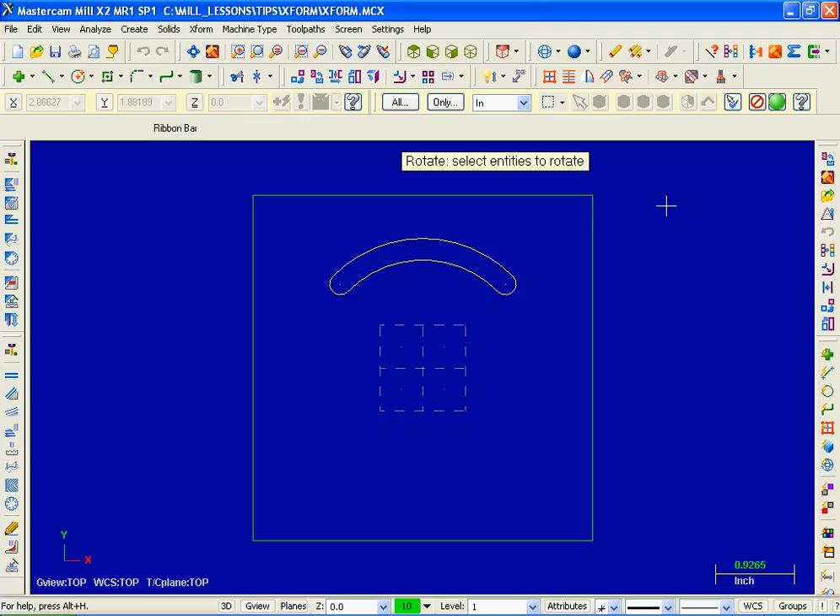slot. Now to move on to the next stage, I'm going to move up to the right side of the screen and click on the icon for End Selection. Now on the left the Rotate dialog box appears, and starting at the top, Copy is activated, so I'm going to keep my original geometry. Now over on the left the number of items is set to 1. I'm going to change that to 2.

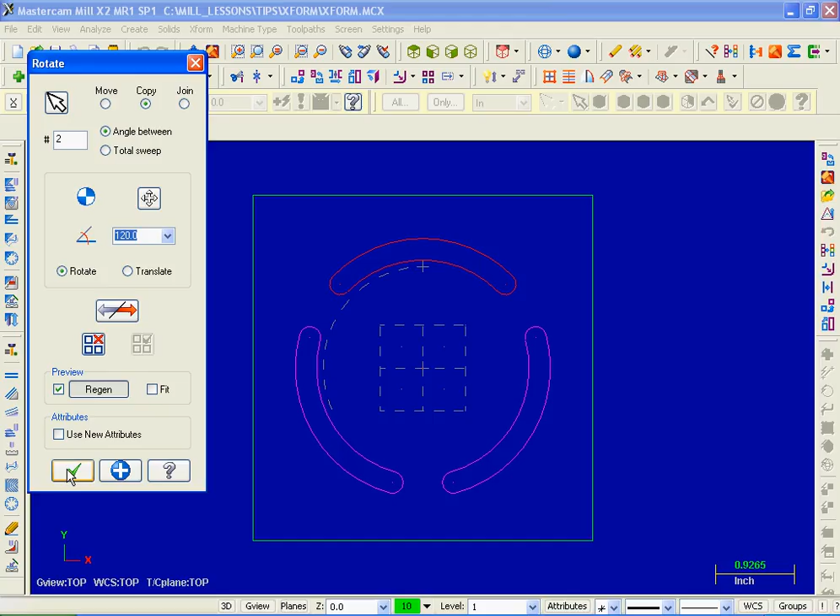Now down below for the angle, what I'm going to do is input 360 divided by 3, which is 120, and there's a preview of our two new slots. Looks good. So we're done here. Over on the left I'm going to click on the OK button. Now before we move on, I'm going to click on Clear Colors and then just slide over to the left and do an undo.

Now the next thing that we're going to check out is mirror, and what I'm going to do is mirror this slot about the x-axis. So into Xform, third one down, Xform, mirror. Now on the graphics screen I'm prompted to mirror. Select entities to mirror. I'm going to hold the Shift key down on my keyboard. I'm going to pick this arc, and once again everything in the slot is successfully chained. To move on to the next step, over up on the right, I'm going to click on End Selection.

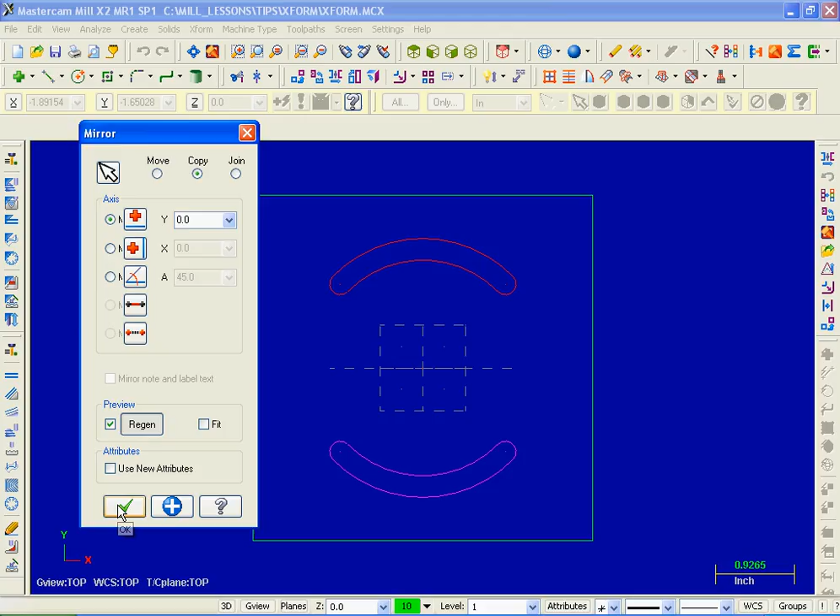Now on the left the mirror dialog box opens up, and at the top Copy is activated, so we're going to keep the original geometry, and I'd like to mirror about the x-axis, so I'm going to activate mirror about x-axis, and there's our preview of our new slot. Looks good. Going to click on OK. Now before we move on, I'm going to do a Clear Colors and then slide over and do an undo.

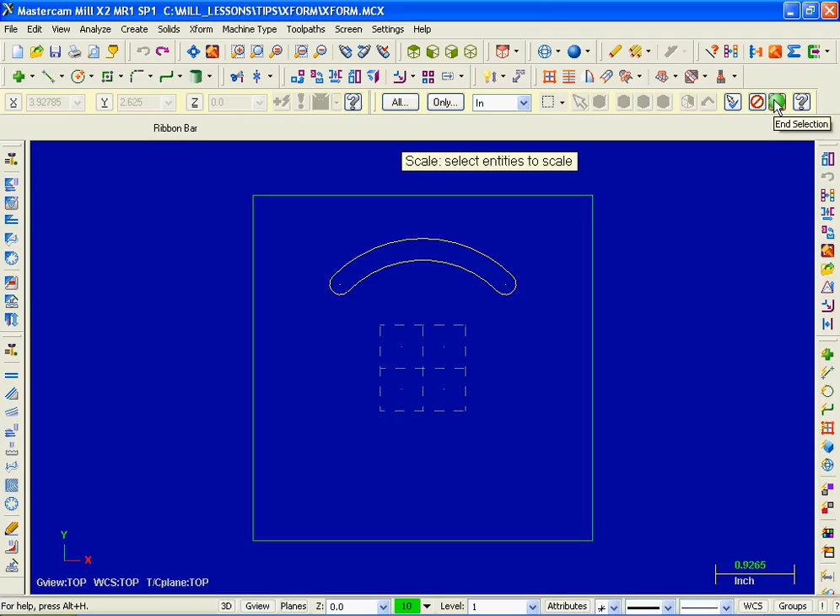Now next up we're going to check out Scale. I'm going to move into Xform and select Scale. We're first prompted to scale. Select entities to scale. So I want to scale the slot down. I'm going to hold the Shift key down, pick the arc, and everything's successfully chained. To move on to the next stage, over on the right, End Selection. Now at the top we've got Move activated, so I'm going to leave it as is. That's exactly what I want.

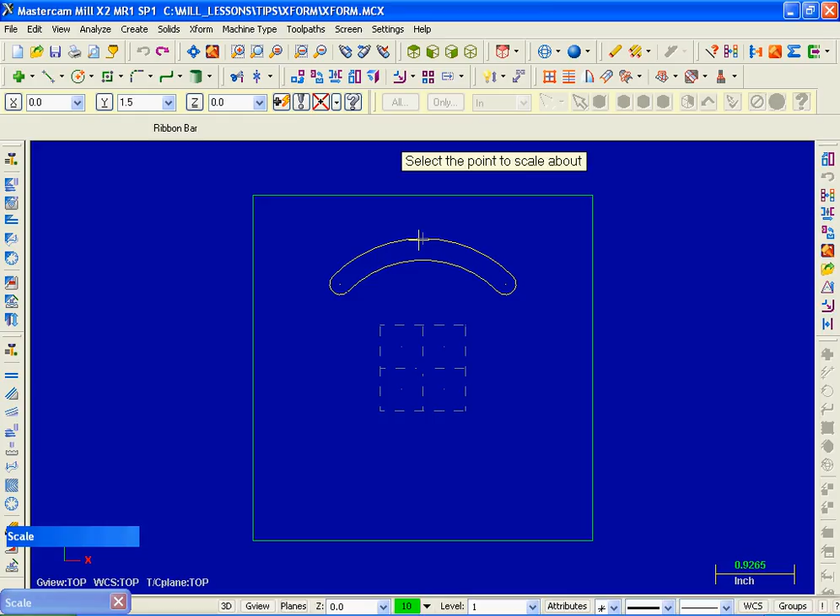And just over on the right I'm going to click on Define Scaling Reference Point. So I'm going to pick on this icon, and then I'm prompted to select the point to scale about, and what I'm going to do is pick the midpoint of this arc. There's the visual cue for midpoint, so I'm going to pick it. Now back in the scaling dialog box, the factor, I'm going to change that to 0.5 and hit enter. We're done. Going to click OK. So there's our slot, half scale. I'm going to move up, click on Clear Colors, and then do an undo.

Next up we're going to check out Translate. So Xform, and right at the very top, Xform, Translate. Translate, select entities to translate is our prompt. So Shift on my keyboard, going to hold that down, pick this arc, and everything's chained. Looks good. On to the next step, over on the right, End Selection.

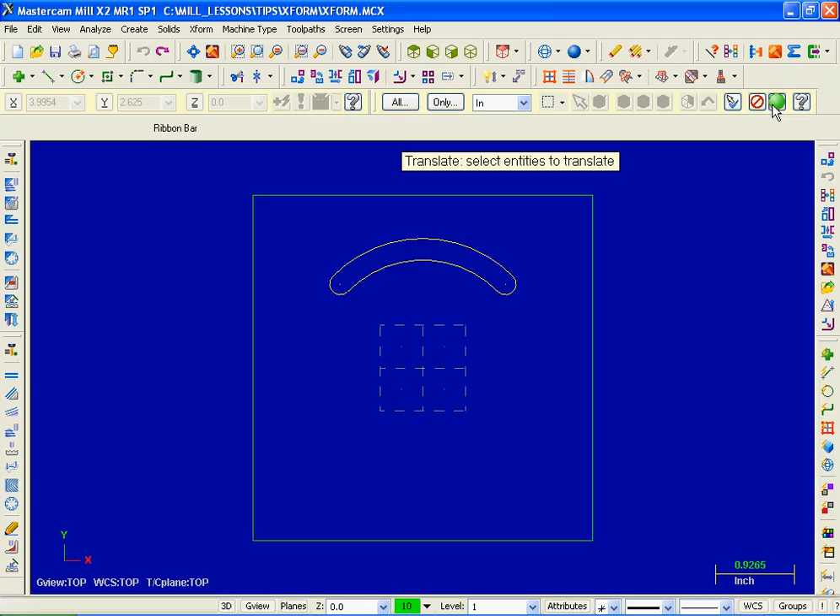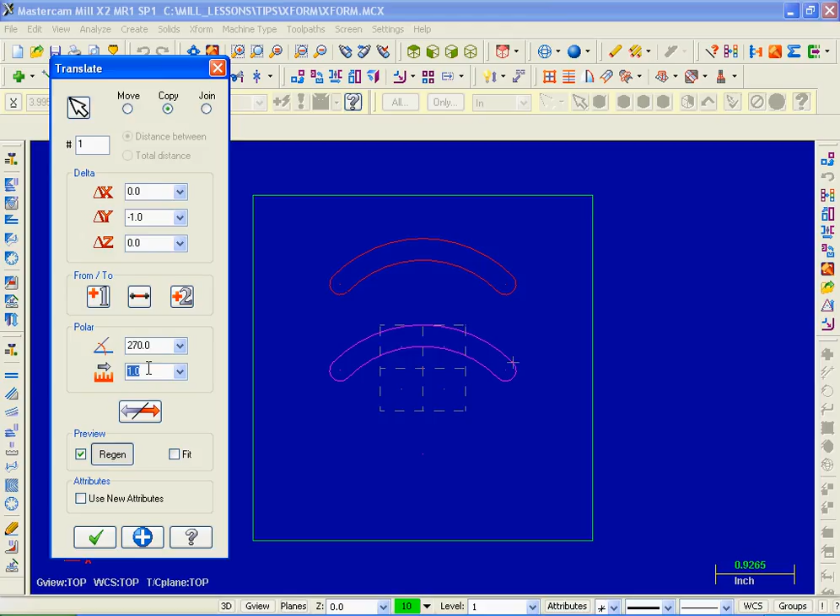Now starting at the top, Copy is activated, going to keep that as is. Number of items is set to 1. Moving down into the polar section, for the angle I'm going to set that at -90, and for the length I'm going to set that to 1, then hit enter. There's a preview of our new slot. Looks good. We're done here, going to click on OK.

Once again up on the right, Clear Colors, then slide over to the left and do an undo.

Now the next thing we're going to check out is Offset. So Xform, Xform, Offset. Over on the left in the Offset dialog box, starting at the top, Copy is activated, keep original geometry. I'll leave that as is, and for the distance I'm going to change that to 0.25.

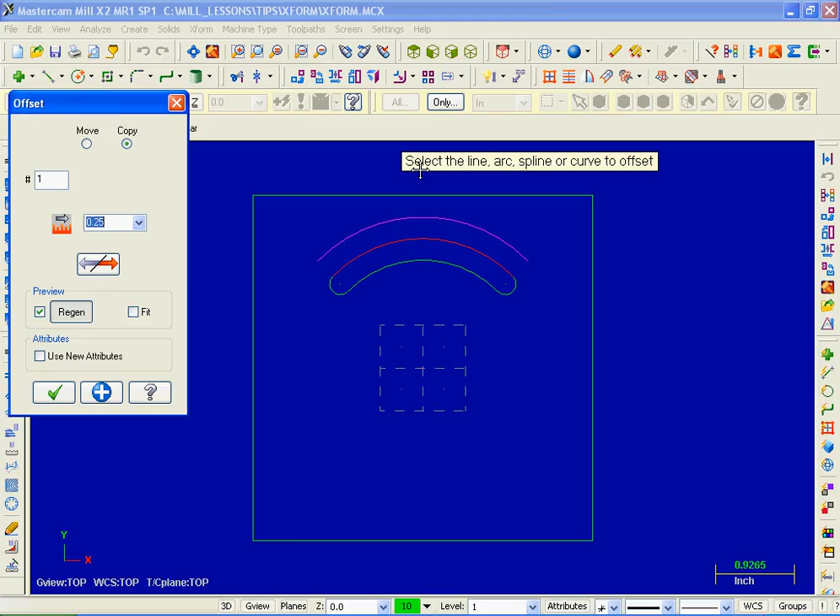Over on the graphics screen, we're prompted to select the line, arc, spline, or curve to offset. I'm going to pick this arc, and the prompt changes to indicate the offset direction. I'll just pick a point above. Back to this prompt, select the line, arc, spline, or curve to offset. This time I'll pick this arc, and for the offset direction, pick a point just below.

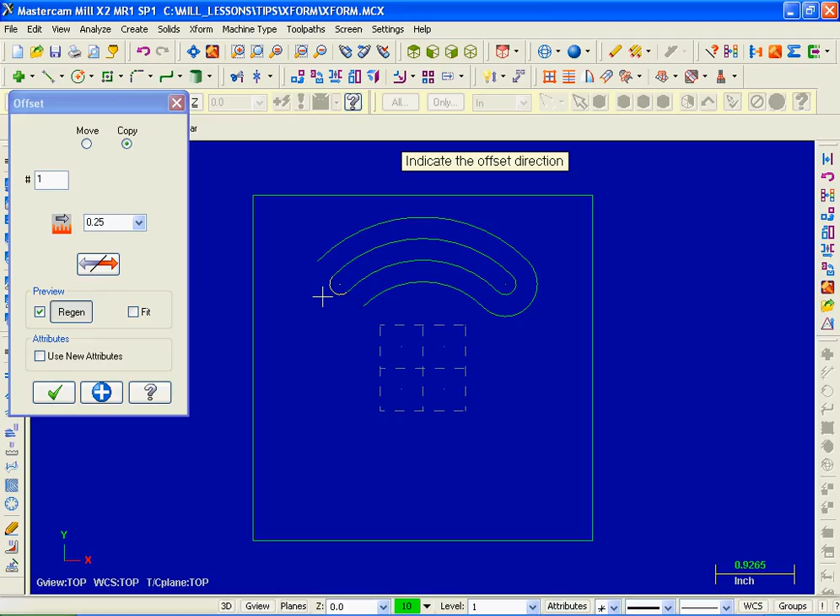Now moving over to the right, I'm going to pick this small arc. For the offset, I'll pick a point to the right. Over to the left, I'll pick this small arc, and for the offset, just move over to the left. So we're done, I'm going to pick OK. Clear colours up at the top right, slide over, and do a bunch of undos.

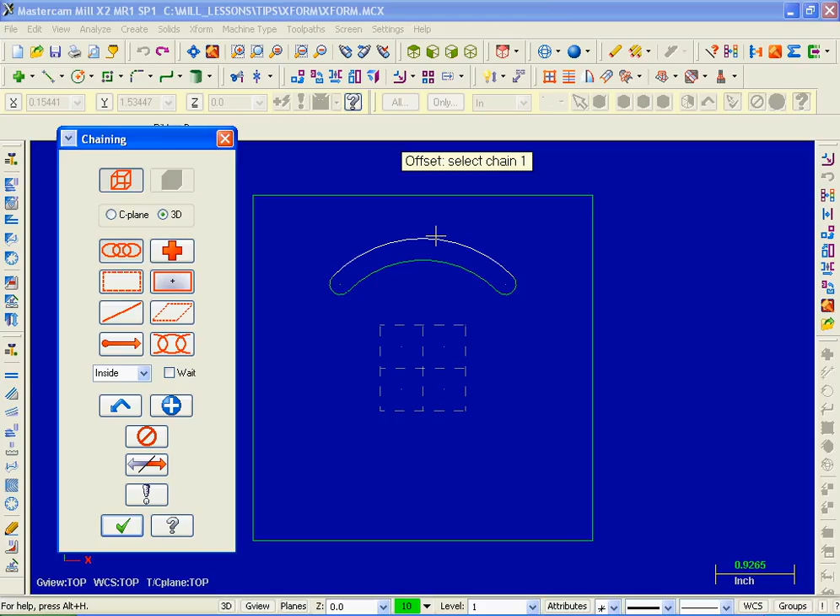Done. Now let's go back into Xform again, and this time let's check out Xform Offset Contour. On the left is the chaining dialog box with chain set, and on the graphics screen a prompt offset, select chain 1. I'm going to pick this arc, everything's chained, looks good. To move on to the next step, I'll pick OK.

Now we've got a warning, it says offsetting of contour has failed, check the offset distance. I'm going to click on OK. We can sort this out.

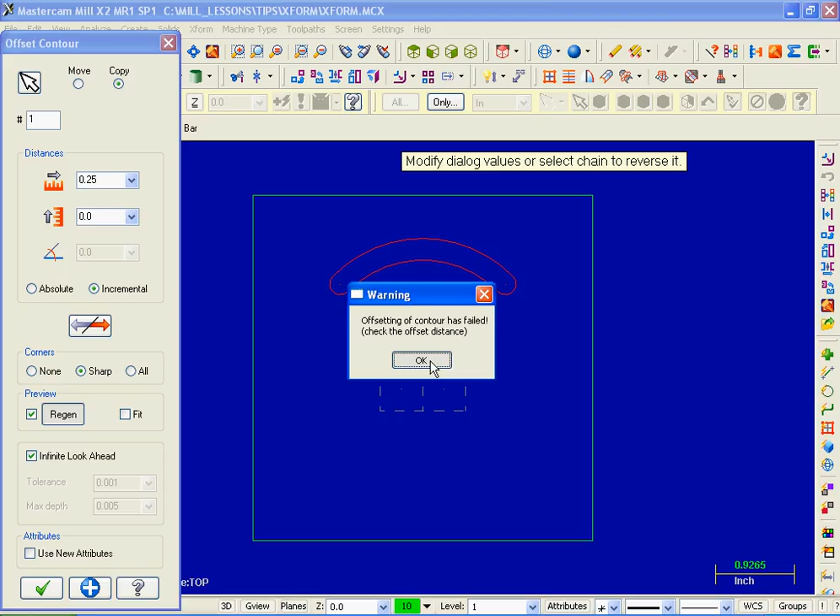Over on the left, I'm going to change the direction, flip the offset direction, and let's see if it works. I'm going to click on it, and it works, looks good. We're done, going to click on OK. I'll move on up to the right, clear colours, and undo.

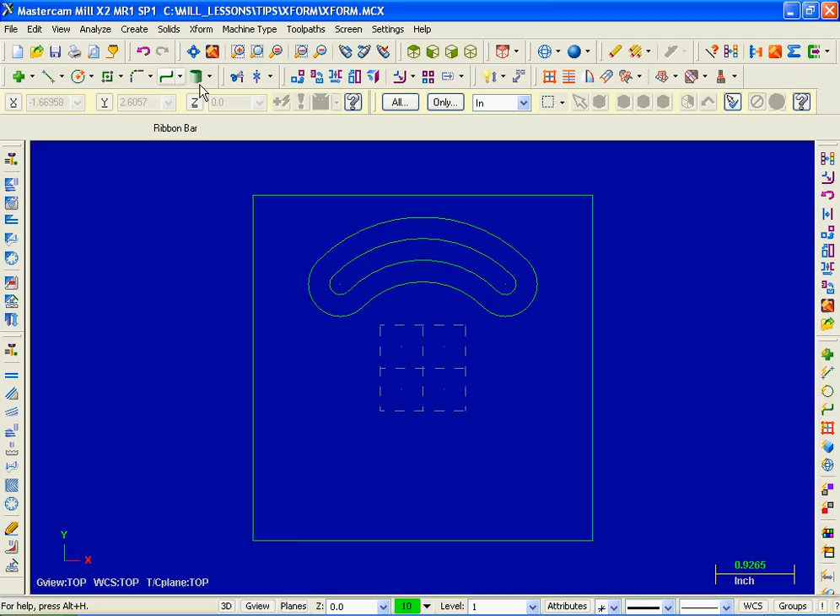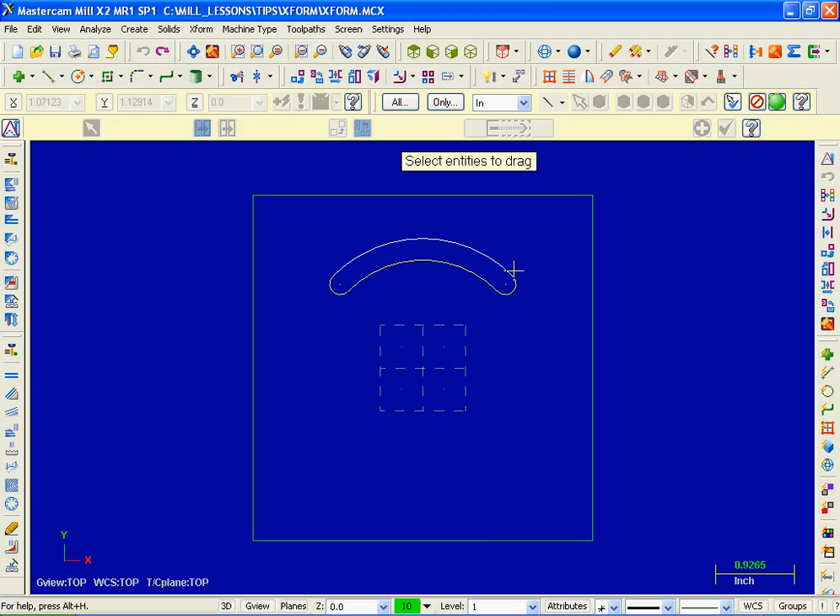Let's go back into Xform, and then right down the bottom here, let's check out Xform Drag. Select entities to drag. What I'm going to do is hold the Shift key down, as we've done before, pick this arc, everything's successfully chained. To move on, hit end selection.

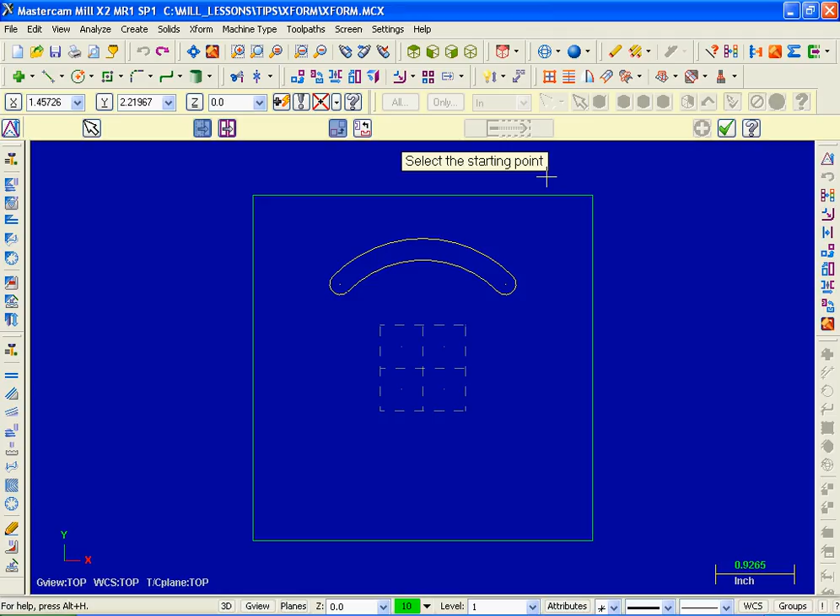Now up on the ribbon bar, I've got move activated, so that's good. At present, rotate is activated, so I'm going to change that and click on translate. Let's sort out this prompt on the screen: select the starting point. I'm going to pick the center of this arc, and for the destination point I'll pick the origin. Looks good.

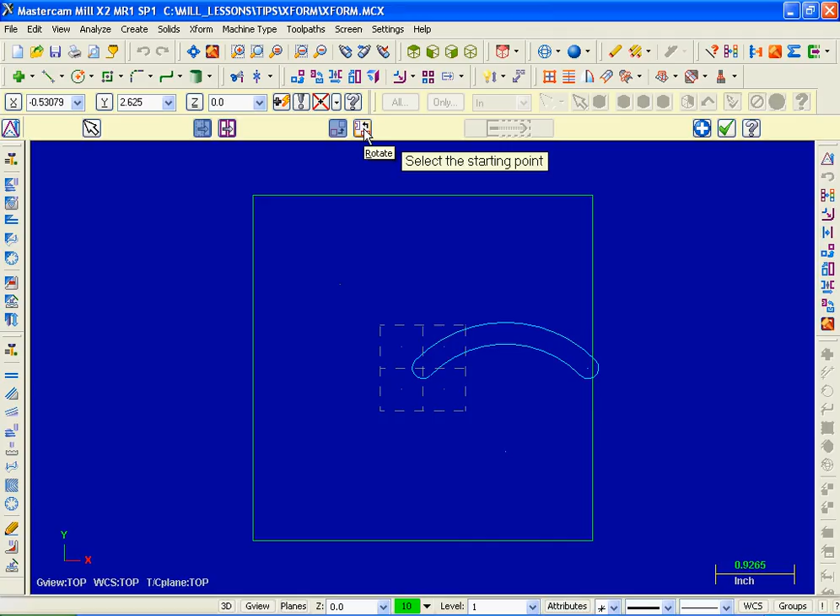Next up, I'm going to move up to the ribbon bar and click on rotate. Select the starting point, I'm going to pick the origin or the center, they're both the same. Then for the angle, I'm going to pick this intersection, this end point up here. And that's it, we're done. And that's Xform Drag, going to pick OK.